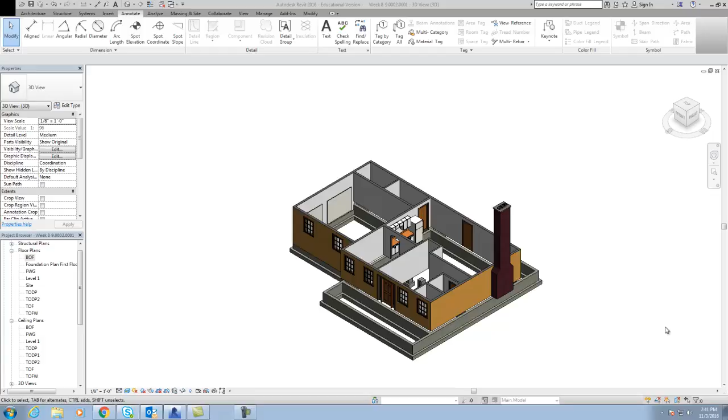Last time we worked on this, we put our foundation walls in and our footers. Now I want to go ahead and put my garage floor in, and put my pad in, concrete pads for my porches. So let's start with this garage.

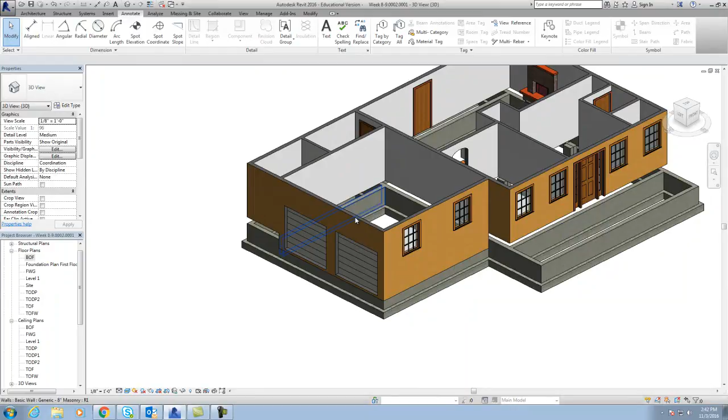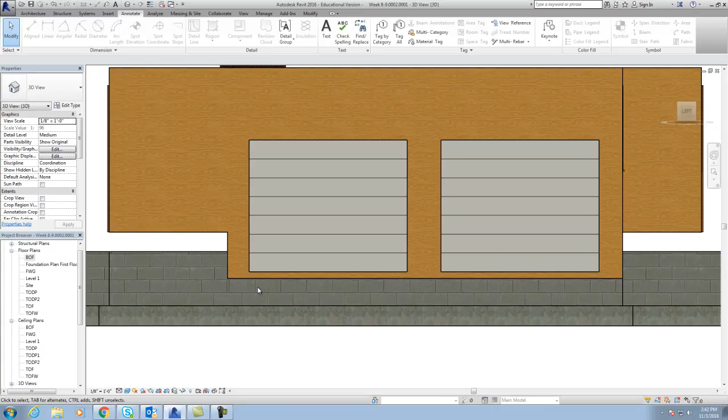I've got some work to do. We cut this down to 2 block high, as you see right here. However, when I come over to about this point, I need to cut a block down 1 block, bring it across, and back up for this garage door to set down in this. The reason is so that I can pour my concrete and have some of it come out over the top, at least 4 inches over the top of my block. That way I minimize any cracking in the concrete pad. So I'm going to go ahead and grab this

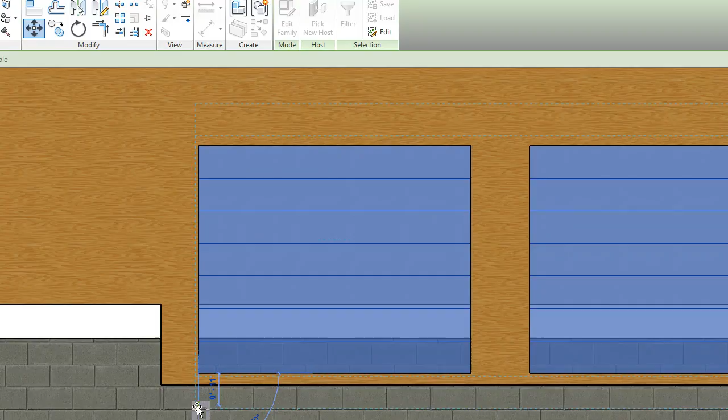And grab this, and I want to hit move, and bring them down all the way down. Should be 8 inches, well it'd be more than that. Should be leveled up. But before I do that, I want to hit escape.

Instead of being in 3D, I need to be in my west view, that way it's more accurate. Click on this, click this, do a move, and we need to move this down all the way to right there.

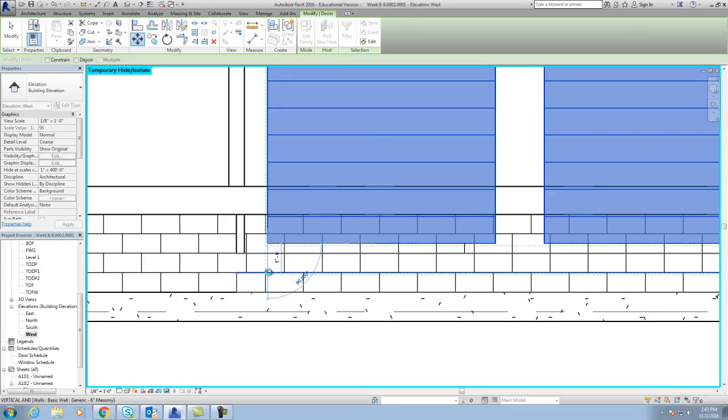And we can go back to 3D, and you can see now that the doors actually went down past the concrete block.

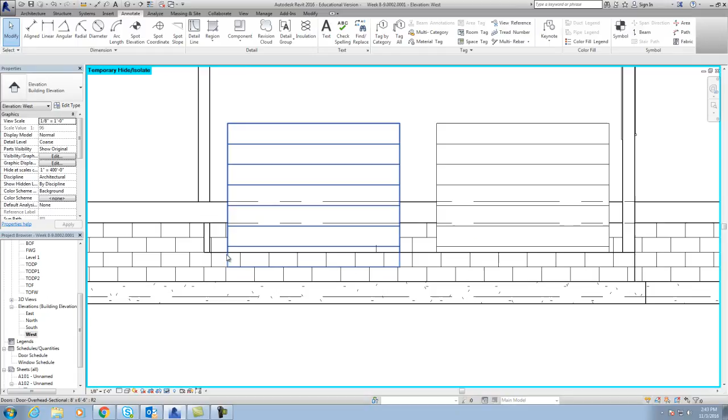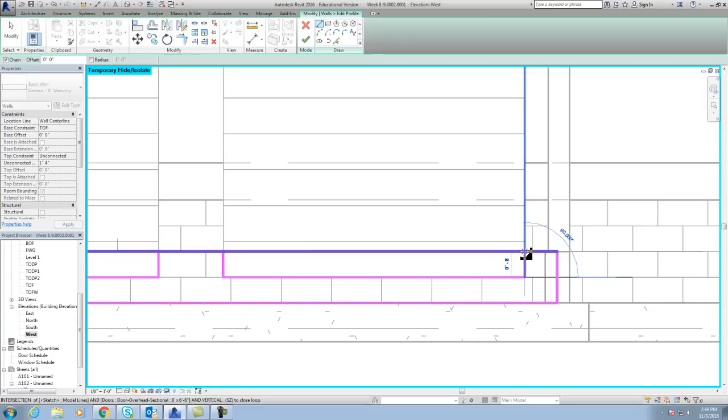So now we've got to adjust this concrete block. To do that, we go back into our west elevation, click on this block, and come up here to edit profile. Grab you a line, and right here where the garage is, bring that straight down, bring this across to right there, bring it up, do the same thing over here to right there, bring it across, bring it back up, and then you're going to run that to there, line, grab that point to that point, that point to that point, and just do a finish.

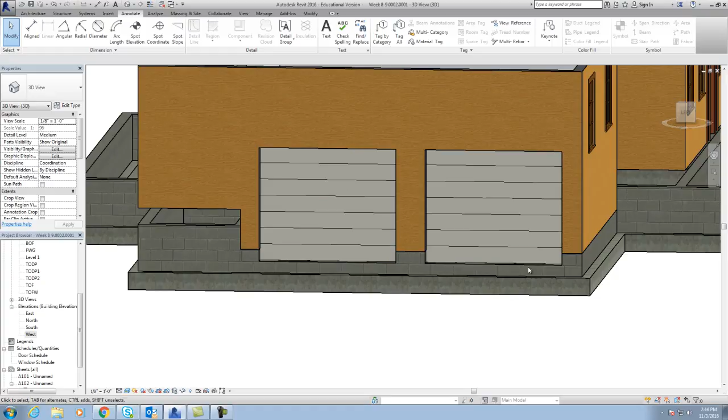If you go to 3D to look at it, you can see now we've got, it comes over, and there's 1 block high, there's that, comes up 1 block high, and this way we can put like a 4-inch bit of concrete pad over top of this, and we'll be in good shape.

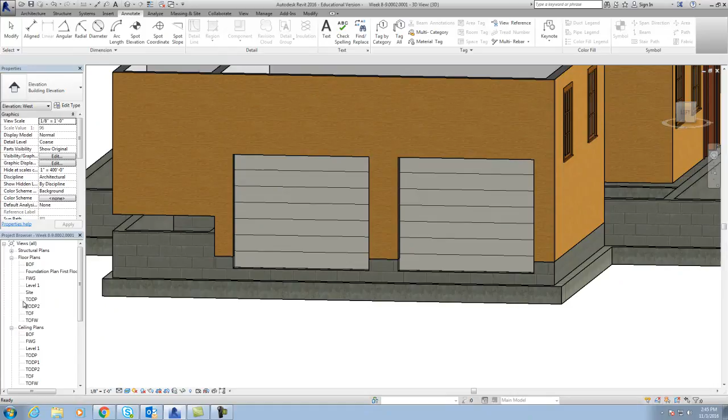So now I'm going to go back into, this time bottom of footer instead of top of footer. In this view, we can see our walls. What I want to do is go ahead and find, we might be able to go top of footer. Let me take a look. Yeah, we can use, let's go top of footer.

That way it'll put it on top of the footer. But let's go find an architecture. You want to go to structure, and we want to put a slab of concrete in, structural foundation slab. And here's a 6-inch concrete slab already ready to go.

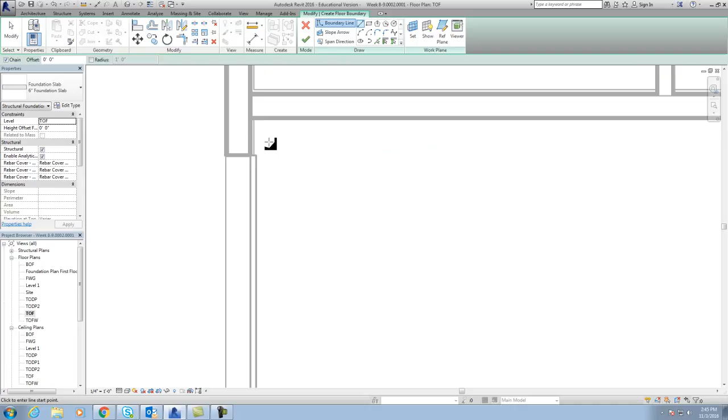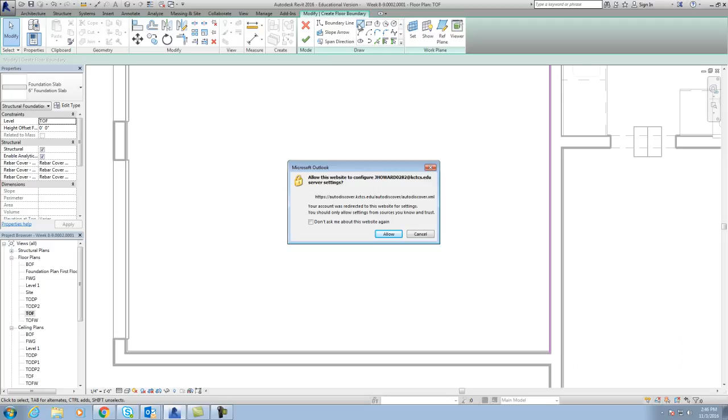So all I want to do is get me a line, and I'm going to come in here, start right at that point, to this point, down to this point. Oop, I gotta watch out. I gotta watch out. Those are good, but down here, I gotta make sure I'm watching because I need to put that right here. All the way to there, over, and then I'm gonna bring it all the way out to the edge of the house.

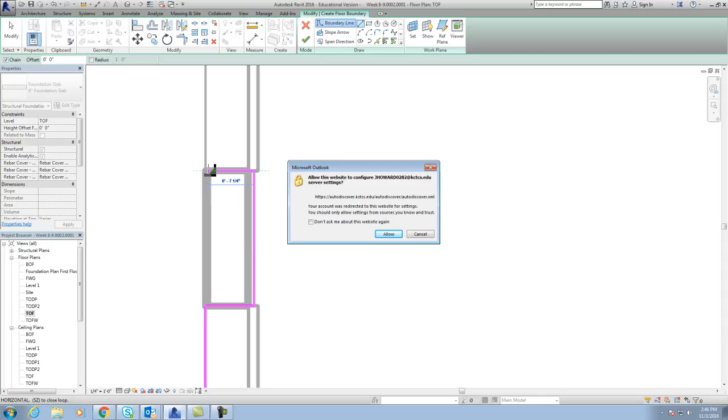To there, and make sure I'm coming all the way into my concrete. Right there's my concrete right there. Bring it up, concrete to there, across to right there, there, and there. And then like these extra lines, you got to make sure you bring them in and connect them.

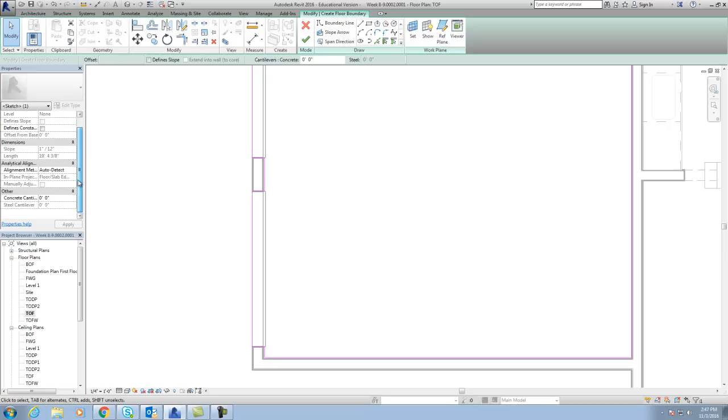Everything looks like it's a go. So I'm just going to, now looking at this too, I've got all that in. I'm going to hit finish and put me a concrete pad in here.

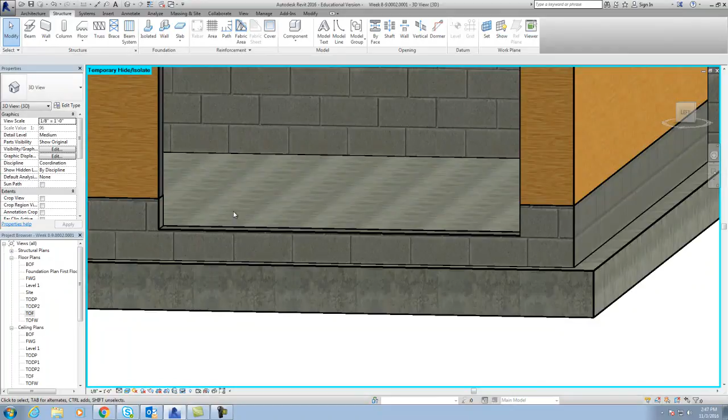But now I don't know for sure if it's at the exact right height. I want to hide this garage door. And I can see my concrete pad now. You can tell it's not at the right level. It should be coming out at least 4 inches up and 2 inches under it, and it's not doing that. So I want to click on it if I can.

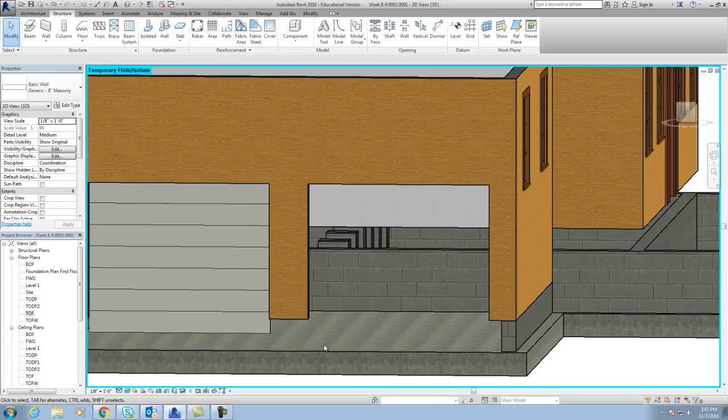That's not it. We might have to click on this and hide it so we can catch it. Right there, and it's kind of blended in with my footer. So I can grab that footer and hide it. And right there it is. Click on it. And top of footer is 0 is the high, so it's going down under the footer.

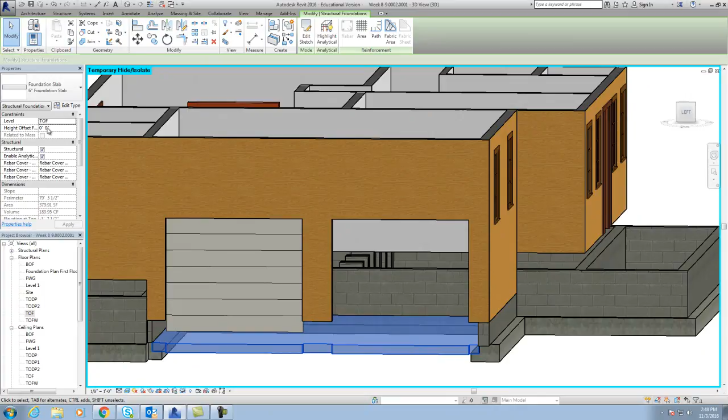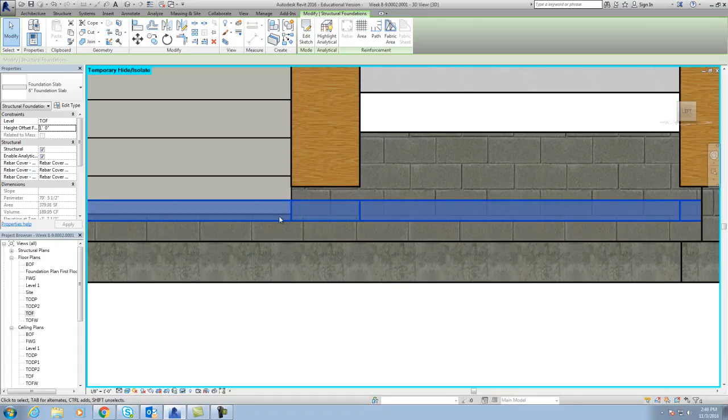I want to put, I would like to see it come up. We know that's 8 inches right there, and it needs to come up 4 inches above that, so it'll be 12 inches above it. So I want 12 inches. Let's see what that looks like. That's perfect. You all see that? It's come up 4 inches above that, and it's 2 inches under that block.

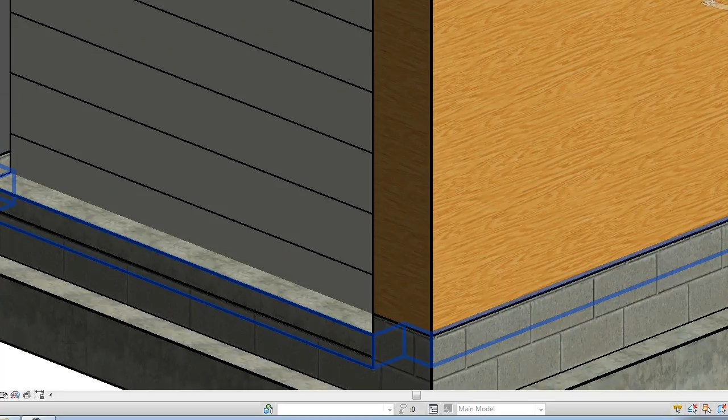And perfect. Now when I reset this, temporary hide, you can see the concrete now. It's actually, and it's showing that it's going right up underneath that. But you know that underneath it's going to stop at the foundation wall, and that's fine. But you can actually see the concrete right there, and that's perfect. That's where you want it. And right there is your concrete floor.

Now also, I want to bring these isolated footers. I want to put 2 of them in here. Or actually, I might put 3 because there's going to be a 1.5 story room over top of this. And we'll figure some more of that out as we design.

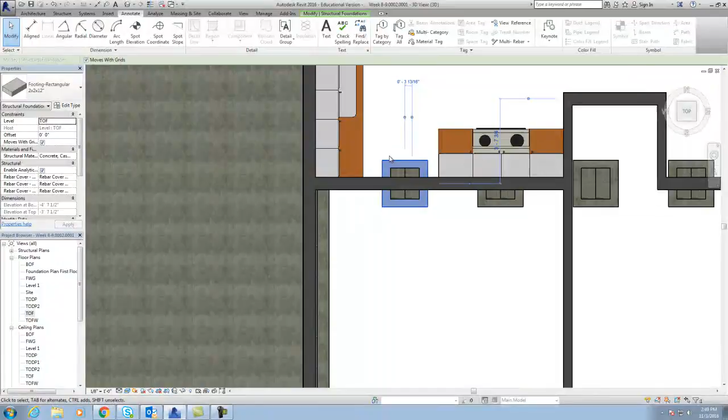We'll do bottom of footer. And when I do an alignment on this, from this one to that edge, and then click to catch that, it's only 3 and 13/16, and I actually need to be at 7.

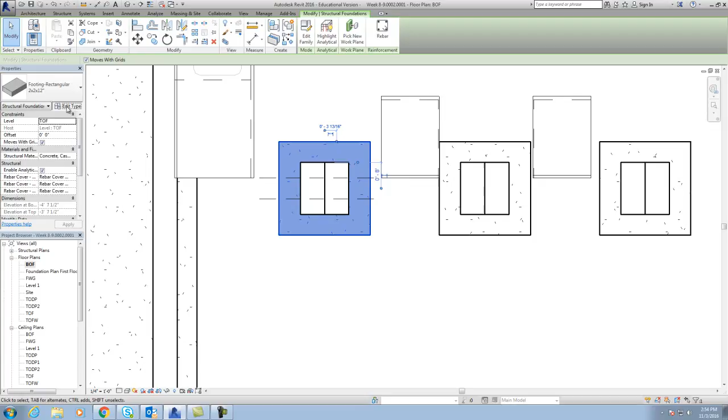So these are 2 16-inch blocks. So 16 plus, you have to be 7 inches off away from the column, and that would make this have to be 30 inches. Hit edit, change this to 30 inches, I'm sorry, not 3 foot. This would be 30 inches to make these correct. Hit apply, OK, and all of them, that gives you 7 inches offset all the way around those. Messed that up last time.

And now I want to take 3 of them and bring over here. Just grab that, copy, make sure it's on multiple. Grab that, just bring it straight over. I'm going to put 3 of those in.

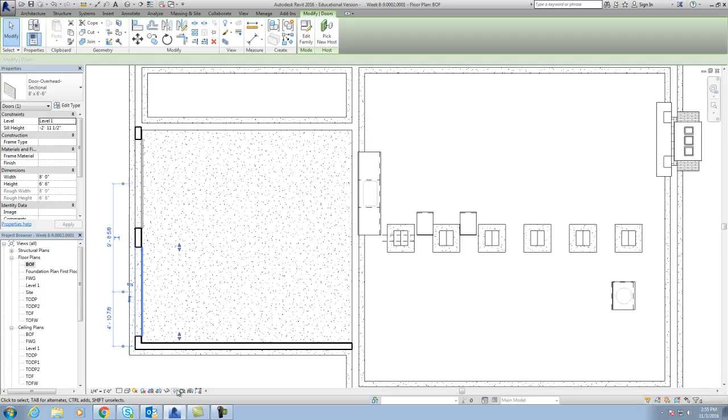I can't tell where they're at because of this concrete, so I'm going to click on the concrete. I'm going to hide this element, hide this concrete. And now I can more or less see them. This might not be exactly in the center of this garage, but it's going to follow the center of this, and it's going to be fairly close.

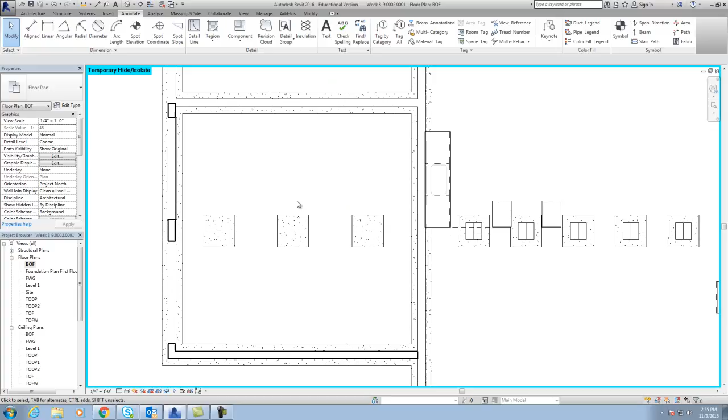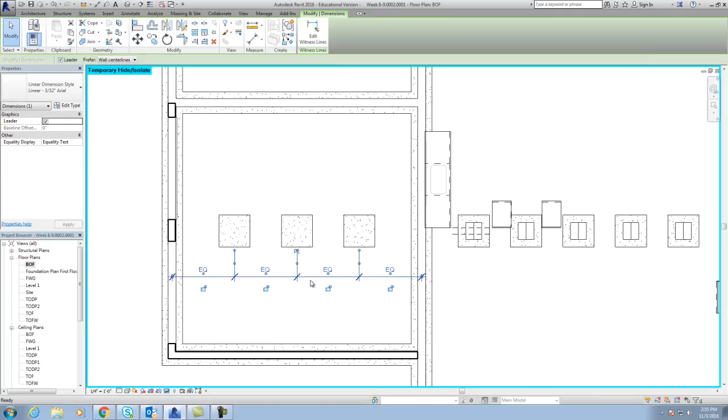What I want to do now is an annotate and align, go off this block, the center of this, and then the center of this. Then we'll hit equal spacing, and that'll have those lined up exactly where they need to be, and it'll be perfect placing for our poles in here to hold up that 1.5 story above.

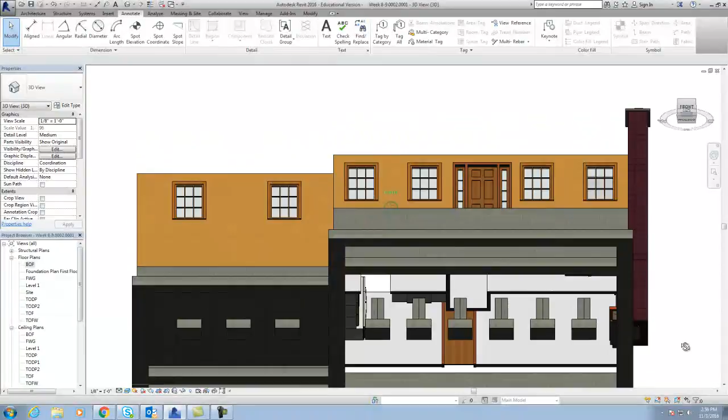Alright, so basically we got all that done, and I need to also make sure, looking under this thing, these isolated footers need to be right up against this concrete. And to do that, we can actually just hide this wall, hide element, and we can hide this footer.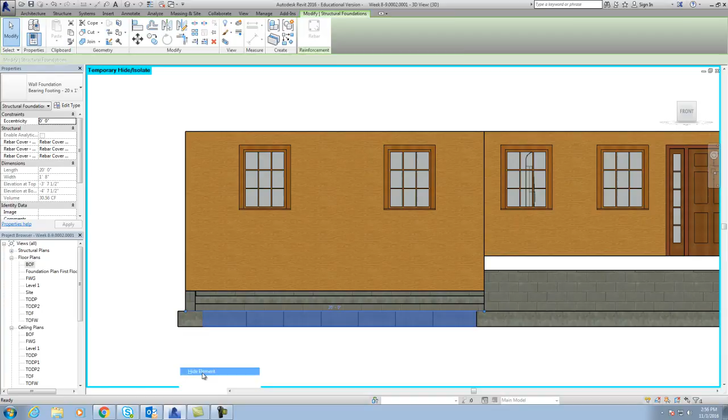And right here is that isolated footer. There's that one and this one. Hit Control, click on those, and I'm just going to use my move command and take that and raise it right up to there. So here's our concrete pad, and here's those isolated footers. And then we go here, reset your temporary hide. We got them.

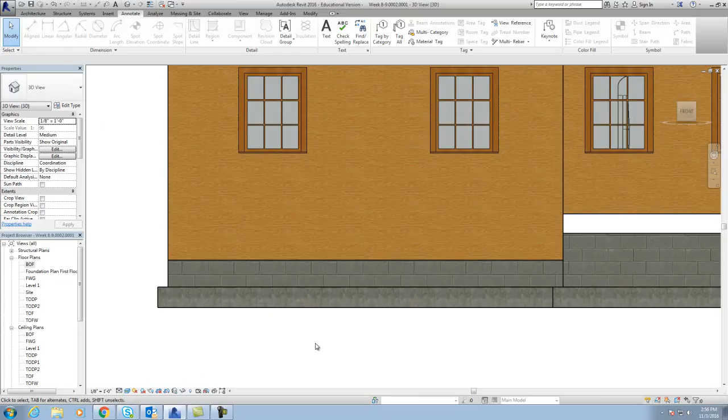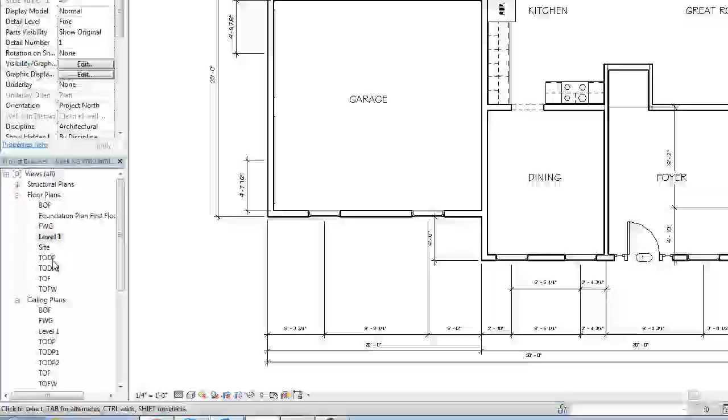Alright, now I want to put the concrete pads on top of these porches. To do that, I'm just going to go to level 1, be simple and easy. It's not showing that in the view depth of it, so I want to go to top of foundation wall. Might be showing it. Nope. Top of footer. We'll just go to the top of footer and make it easy.

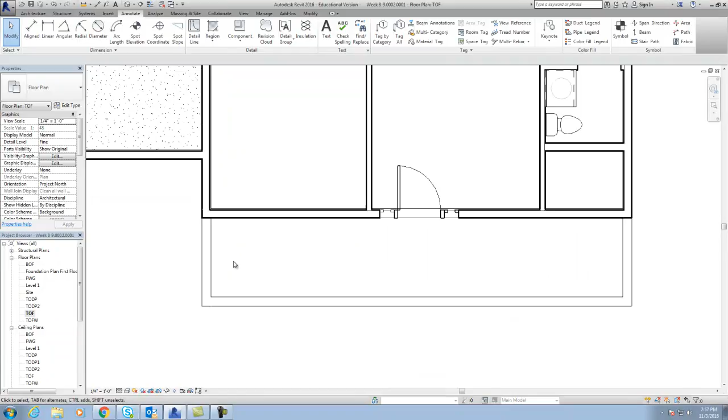Now we can adjust our depths over here with our view range. And in here, I go to structure, I go to slab, and it's going to be this is going to be a 4-inch to a 6-inch slab. So I hit edit type, edit the structure, and I'm going to go in and do a 4-inch, which is actually going to be a 3.5-inch concrete pad, and hit OK on that.

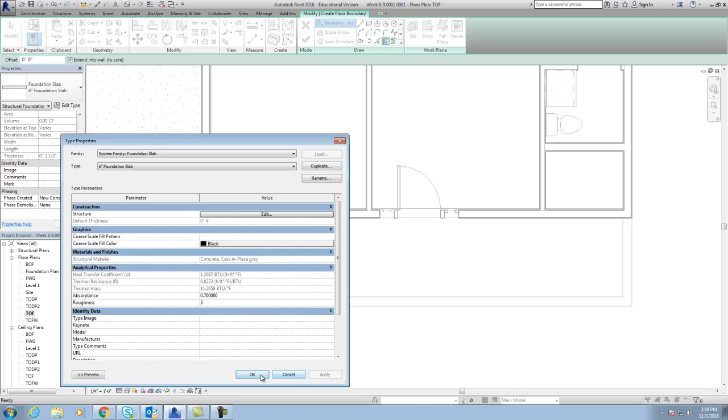Apply, and I messed up on this. Let me go back. We need to duplicate first. This will be 6-inch. OK. Apply. OK. And then I want to edit, duplicate, and this will be a 4-inch, and it's going to be actually 3.5-inch concrete. Hit OK on that.

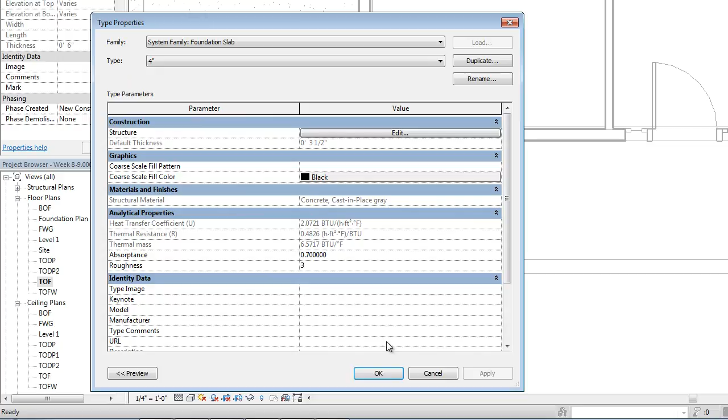And you see how the 4 is up there. And I'm going to take and just go around this real quickly, just like that, and we'll close it up. And then I'm going to do an offset, because they're going to be a little bit of an offset to that concrete over those blocks.

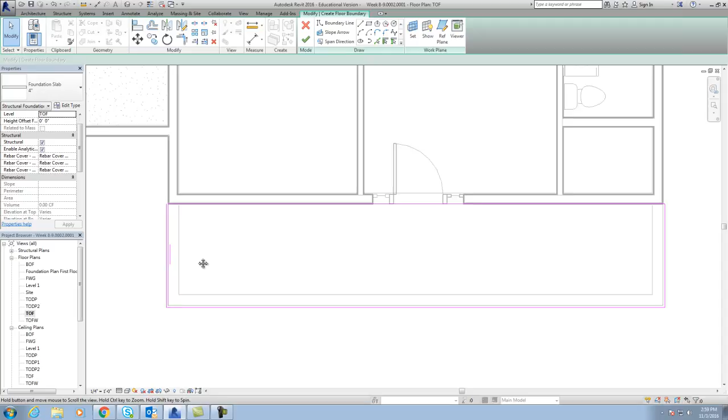Doing offset right there. This will be 1.5-inch. And you go right there to that side, because that'll be your form, which will be a 2x dimensional lumber. Pull that over. Pull this one over as well. And then hit finish. We'll take a look at this, and it's down here.

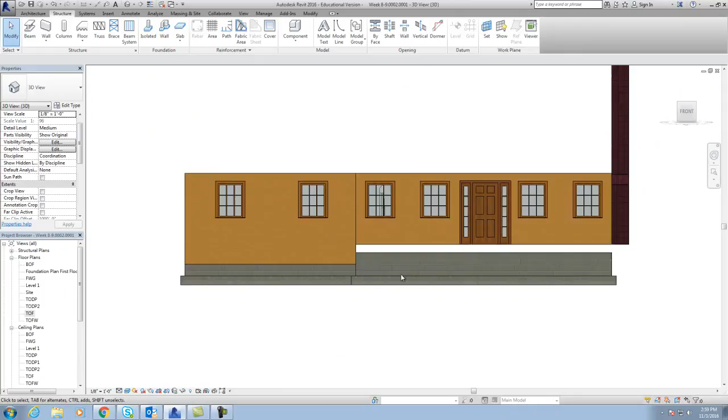You all see this? Way down there. And we need to bring it to the top of this, and I'm just going to hide this. Hide element, and I'll grab that, and I want to move this straight up to the top of this, and we got her. Right there is exactly where it needs to go. We'll reset temporary hide, and you just need to do the exact same thing over here on this side.